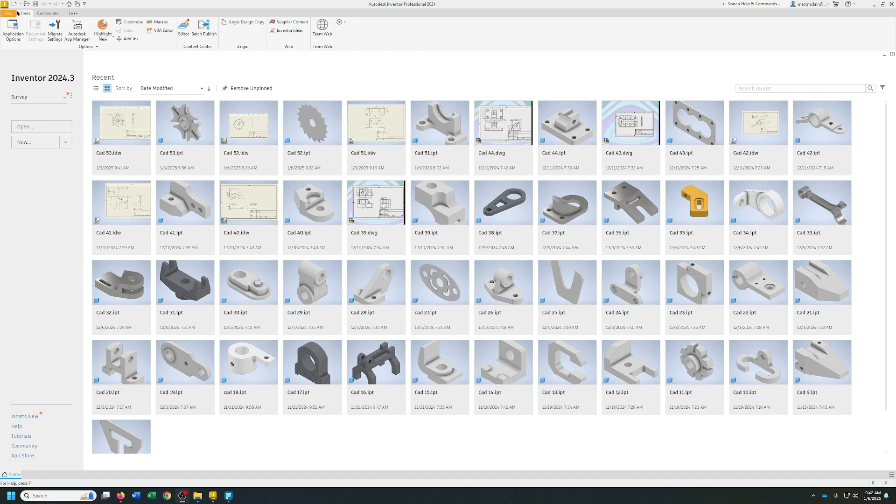All right, now we're ready to do CAD 54. We're going to do a section cut on this one once we get it laid out, okay? But first we got to get it drawn. So let's go, and it is in inches.

This is the hub, okay? So if you want to, say we don't have anything yet, right? I'm gonna go ahead and explain all this so that you can see what's there. All right, your views, your model states, let's go ahead and get this thing going.

So start 2D sketch, and we're going to actually pick the bottom plane. Don't forget to rotate it 90 degrees so the top is readable. All right, we're gonna go with the big circle. So we got a diameter of 4.5. All right, that was easy enough.

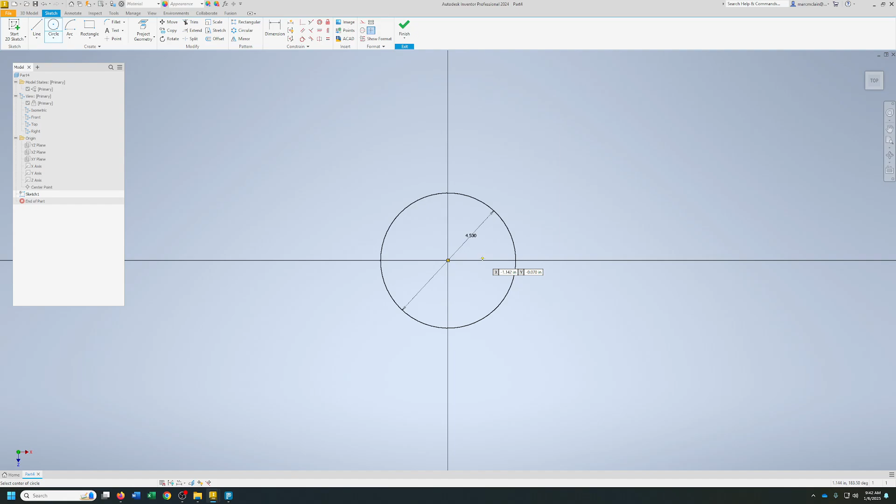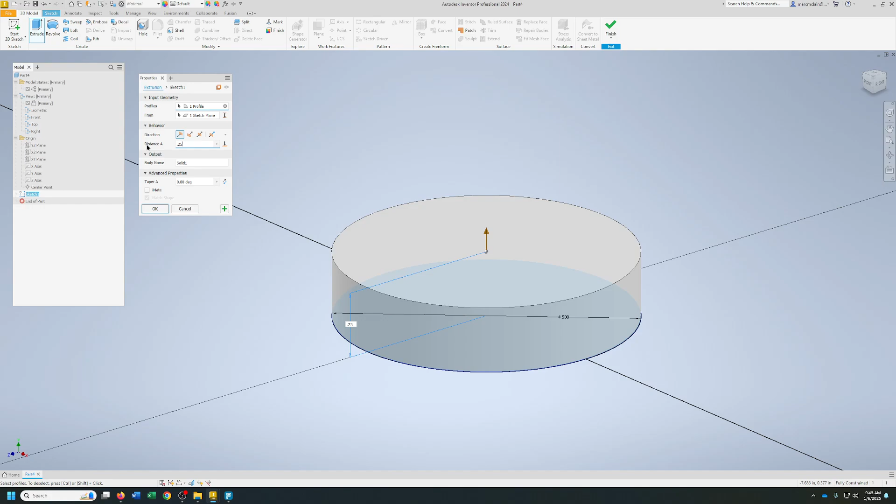I'm going to go ahead and extrude that. Now, what I could have done is I could have done all of the circles as well. But I want to show you a way to get a bunch of holes into something if you ever have to do it a different way. So I'm going to show you a different way on that. So this thing is 0.25, and there we go.

All right, now I'm going to pick the top. Don't forget, rotate that sucker. Okay, so we've got 8 holes, 0.375. All right, once again.

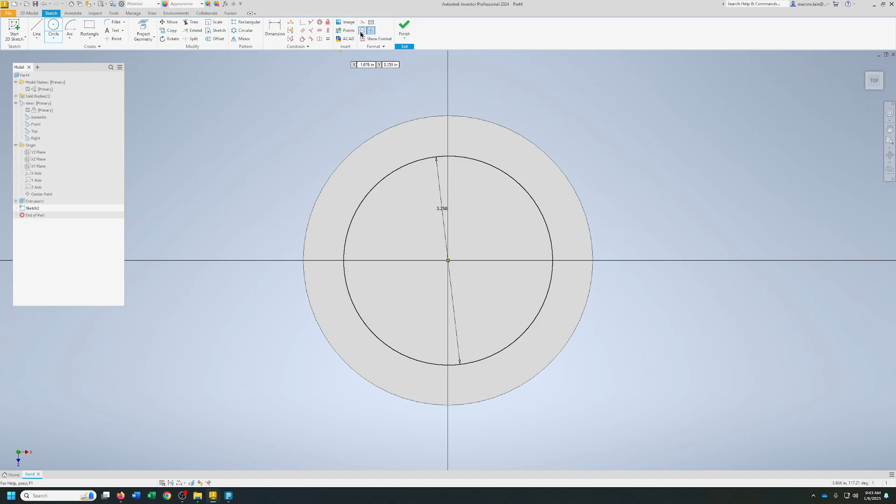Now this diameter is 3.25. Now, take it off of that. Okay, get our one circle up here, 0.375. And then we'll use circular pattern. So I'm going to pick this, pick the axis, pick that, okay? Now that will get my holes.

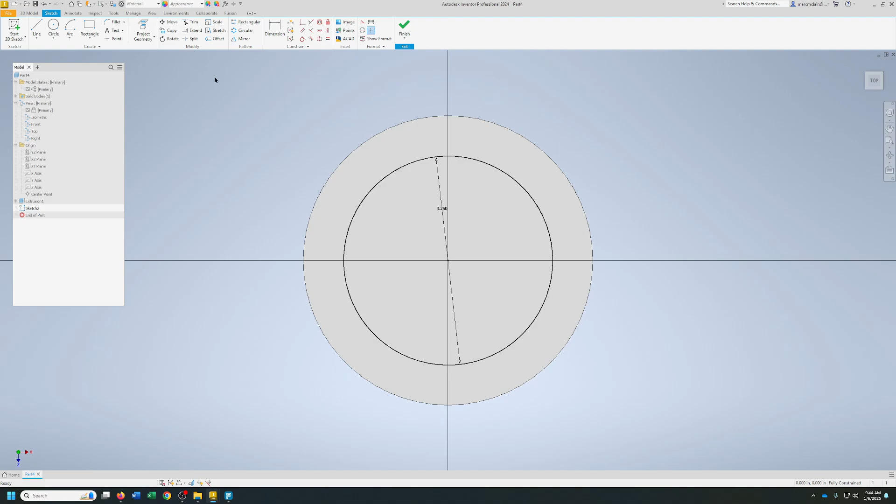That's not necessarily what I want to do. So I'm going to take that out. All right, so I've got this. I'm going to use point, okay? And I'm going to put a point right there. So there's my point. So I'm going to grab the point, and then I'm going to do the circular pattern,

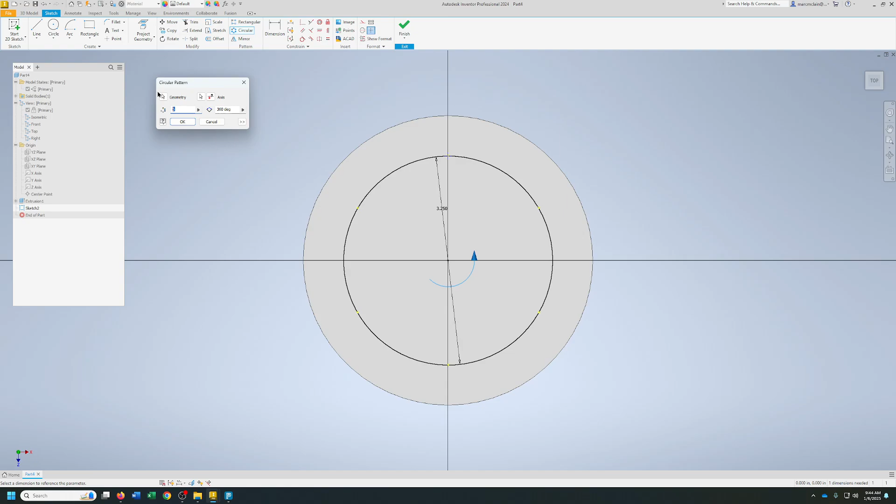Okay? And it doesn't matter if you put it on associative or not on this one. So I'm just going to leave it alone. Be 8 of them total. Okay, so there's my 8 points. I'm going to finish that sketch.

Now, hole. See? Does them all. 0.375. Hit OK, and there's those. All right.

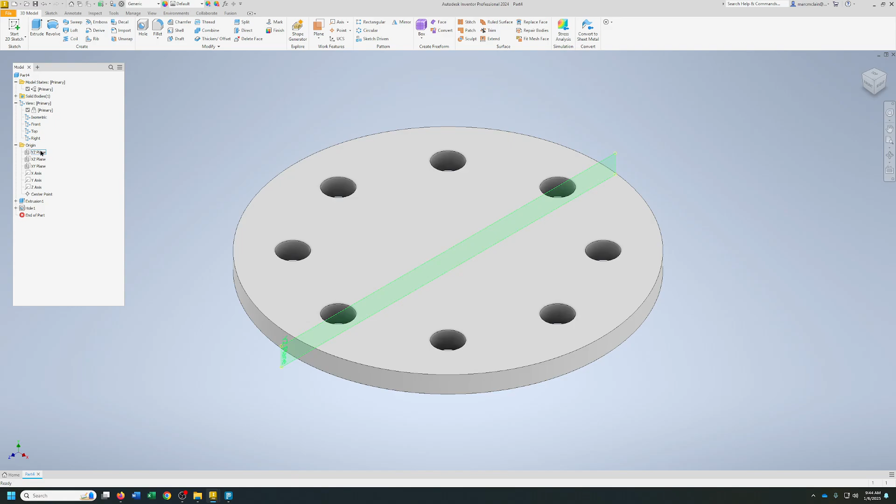All right, so that's the base. Now we got to get the other part. So remember, I did it right through the center. So we can pick either of these planes. I'm gonna pick XY. F7, that splits it. Okay.

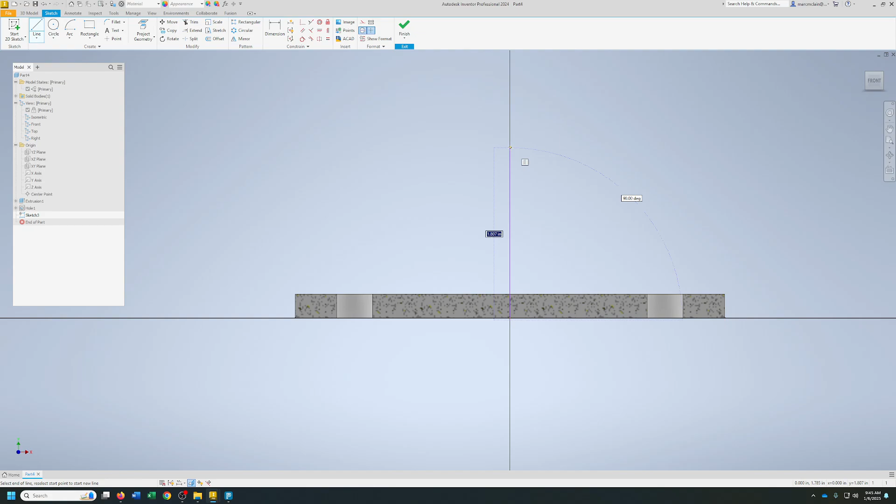Now, what we want to do is we want to get the tower part of this. Okay. So I'm going to draw a center line. And we'll start here at the bottom, and I'm going to come straight up with it. And it doesn't matter how far because it's just going to be our center line. Now, I'm going to lock that center line in place. So I'm going to hit lock and lock it.

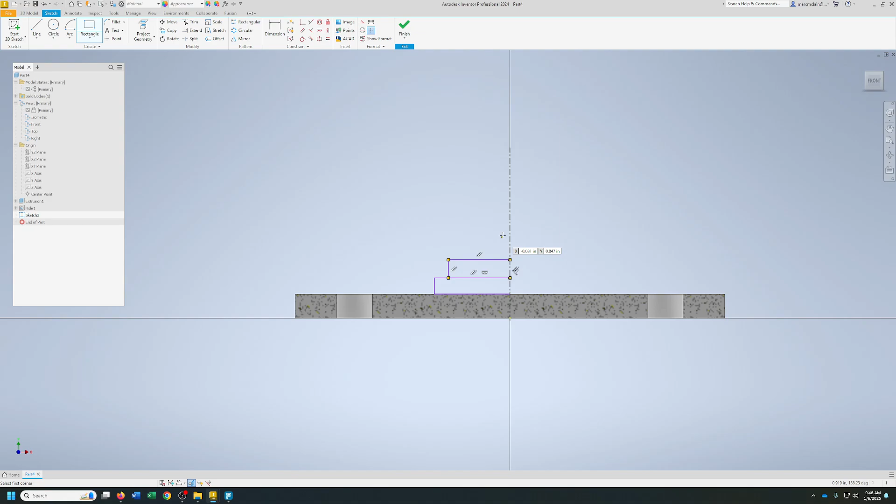Now it's rectangle time. Oops. I always forget. There we go. Let me turn that off. There's one. And then another one. And then another one.

All right, now we'll clean up a little bit. Get rid of that one. Get rid of that one. Get rid of that one. Each one of these is going to be 0.25 tall, okay? All right.

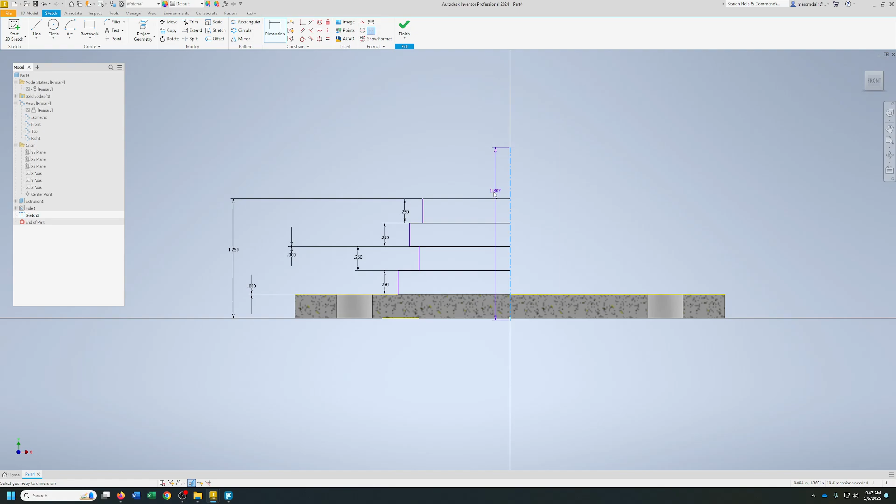Make sure that that's, yep, we're good. All right, so now we're going to get our widths. Here's the cool way to do that. We're going to do dimension. We're going to pick the center line first, and then we're going to pick the edge, okay? Now it gives me what's known as a linear diameter, and that's what we want.

Top one is 1.5, okay? This one is also going to be 1.5. Those two line up, okay? This one, see, if you pick that one first, how it messes up. Always pick the center first, okay?

This one is 1.75. And then the bottom one is 2. All right, now we've got that, so all of our stuff is there. I'm going to go ahead and trim through here.

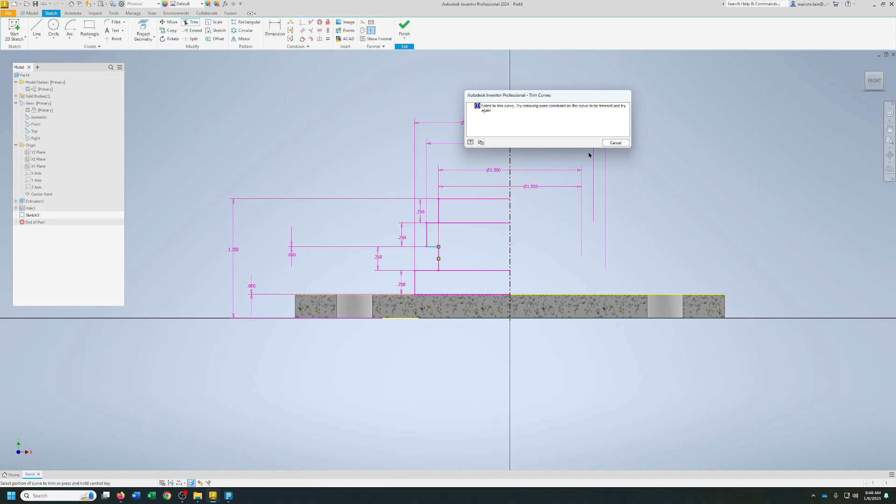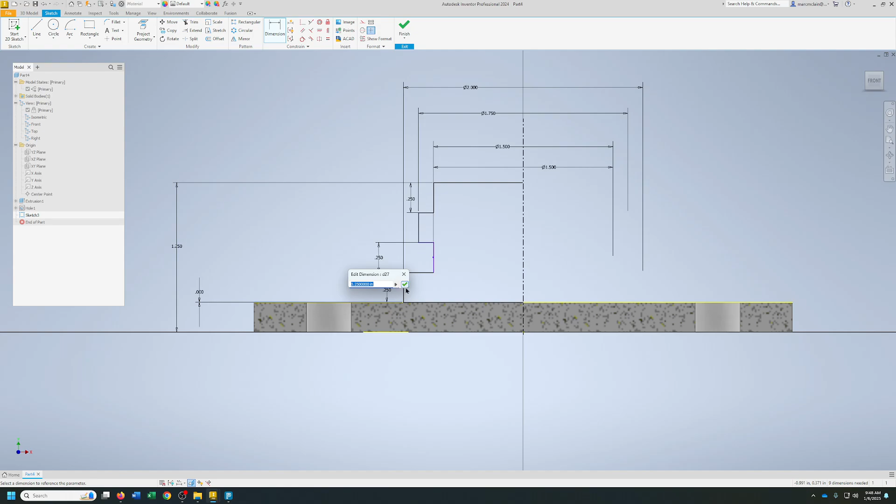There we go. Now I'll put that dimension back. So that's got that, right?

Now, I'm going to draw a line straight down through here. Actually, no, I'm going to draw a line straight down here. And then I'm going to dimension that line.

So once again, we got our linear diameter. And that hole in the middle is a diameter of 1. So we'll say that. And then I will trim this off and that off.

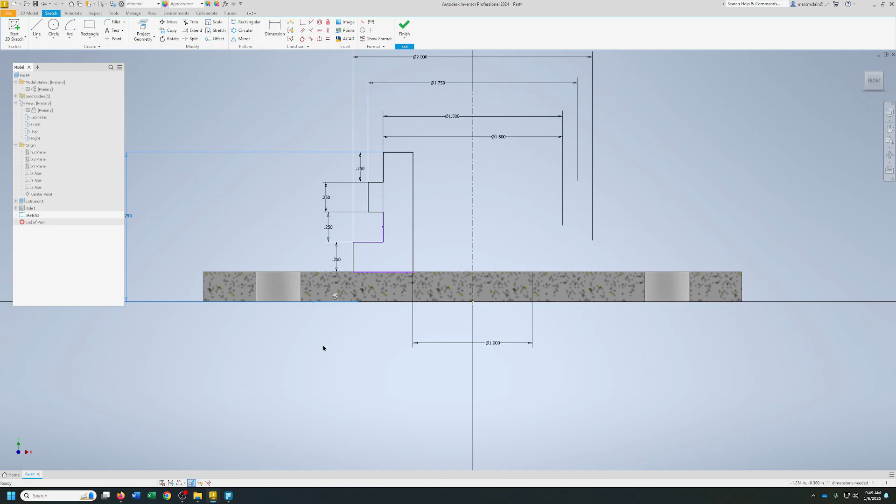There we go. All right, now, 3D model, revolve. Just pick that. See what it does?

Now, all we got left to do is the hole in the middle. So I'm going to pick this, new sketch. Project geometry, that 1-inch hole, 3D model, extrude, cut through all. And we are good.

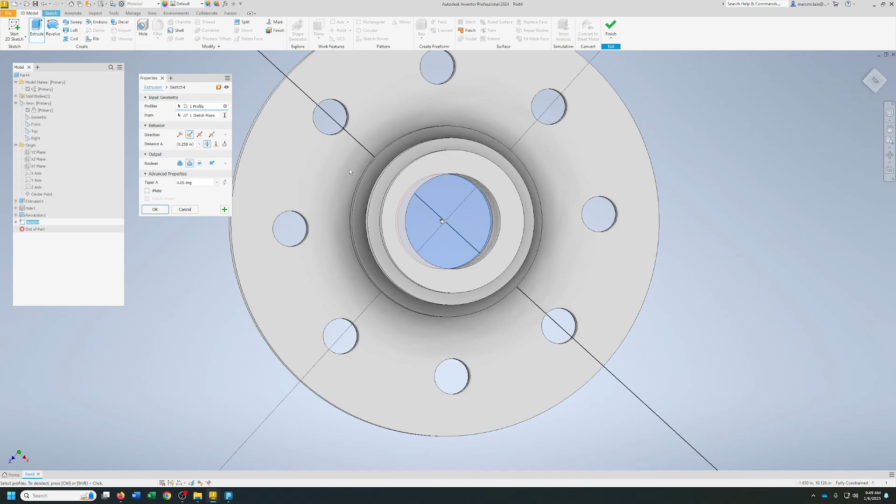All right, so that's got that part. All right, now in our layout, see now we got a solid body up here. So we'll rename that. This is called the hub.

Easy enough. Once again, no material, so we'll just hit update, get you all your numbers, hit OK, and we will save this as CAD 53.

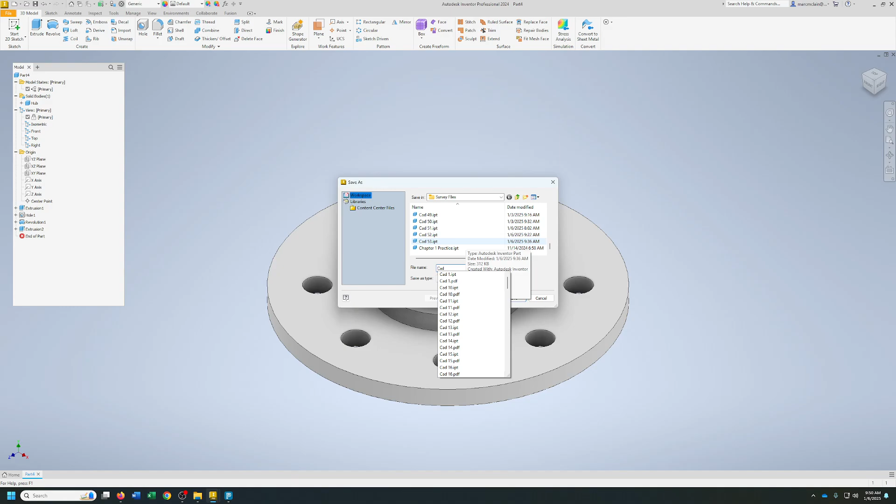Excuse me, CAD 54. Save that as CAD 54. And we'll get our new one. Okay. Once again, doesn't matter. Either one of these is fine.

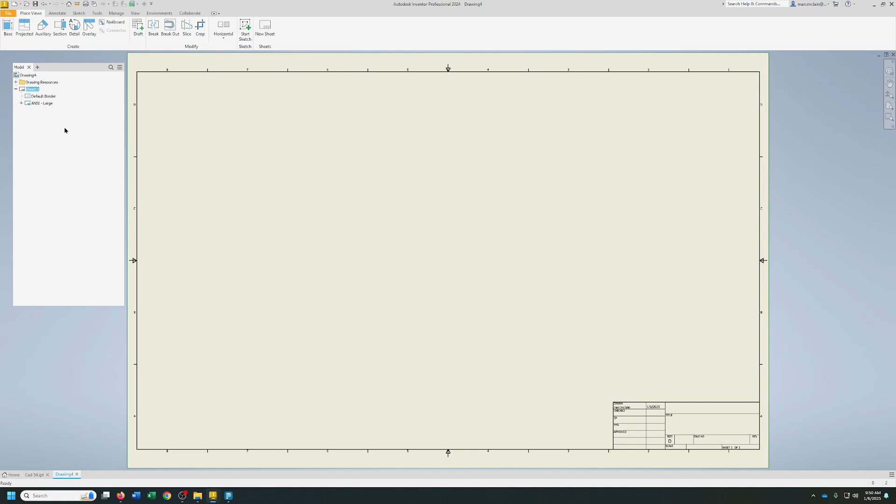And we'll change our sheet size to 11 by 17. And do our base view. All right, now, I don't want the front to be the base view on this, so I'm going to hit this, and that's going to rotate it up.

All right, now I'm going to pull this over here. They're showing a top and front view, so that's what we'll do. But the front view is not going to be just me placing that. We're going to place this view and hit OK.

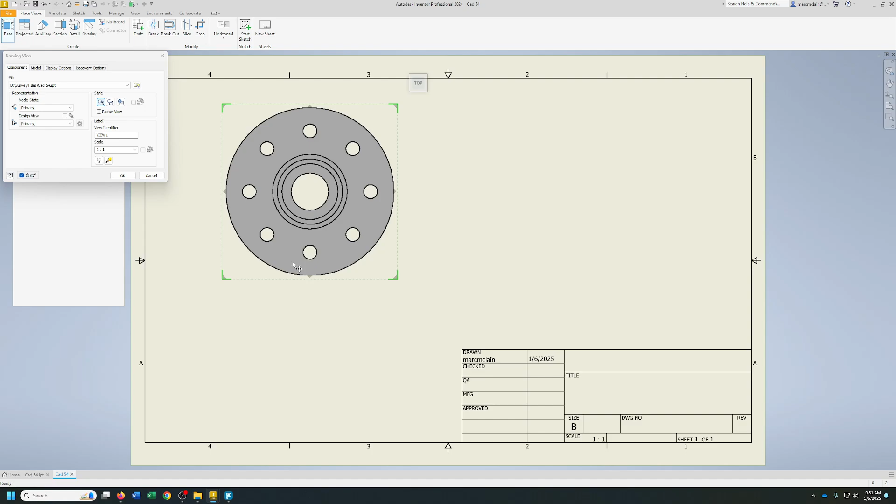All right, now section. Pick that. We want to line up with this. Go through there. Make sure you go. Don't stop on the edge. Go past the edge a little bit. And there's your section view.

Okay. Now we can start dimensioning. So annotate, and we'll do this first. Pick here. 1, 2, 3, 4, 6, 8.

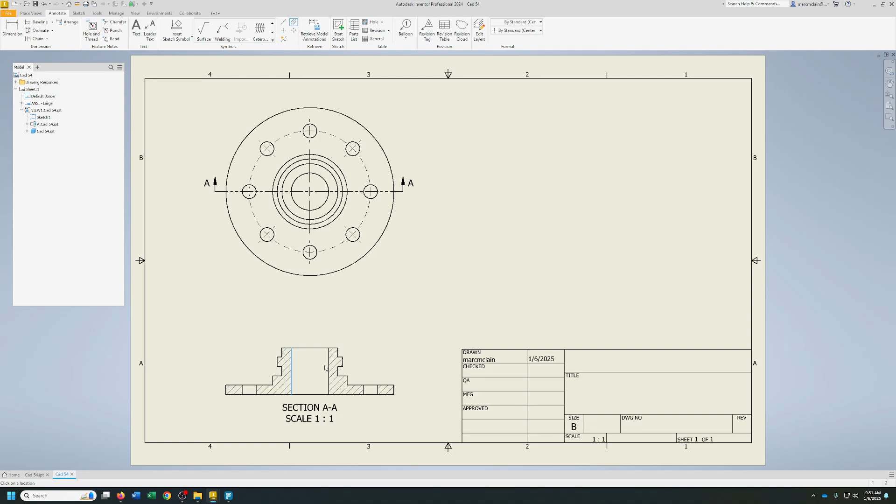And there we are. Now I'm going to use this. Pick this line and this line. See how it gives me a center line through those? Do the same thing with this one. And the same thing with this one.

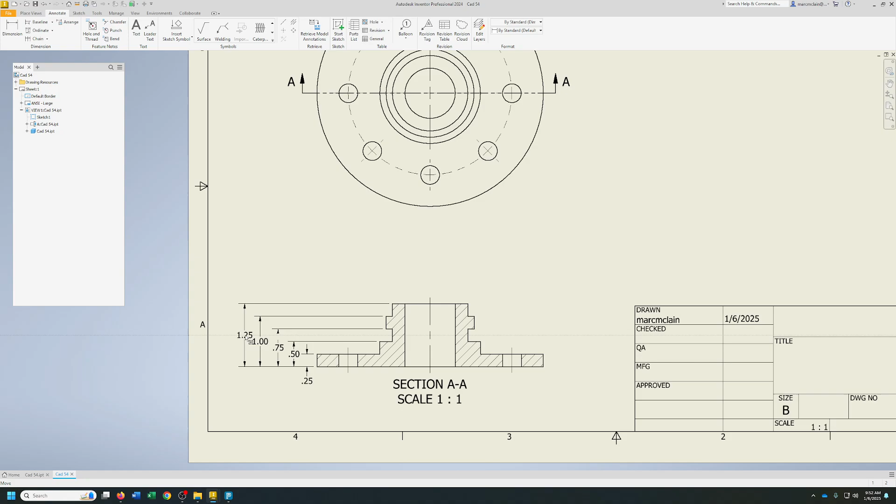All right, now baseline. 1, 2, 3. There we go. All right, that's got that.

Now we can just do there we go. Change our that and then go back to text. Hit the home key, 8X.

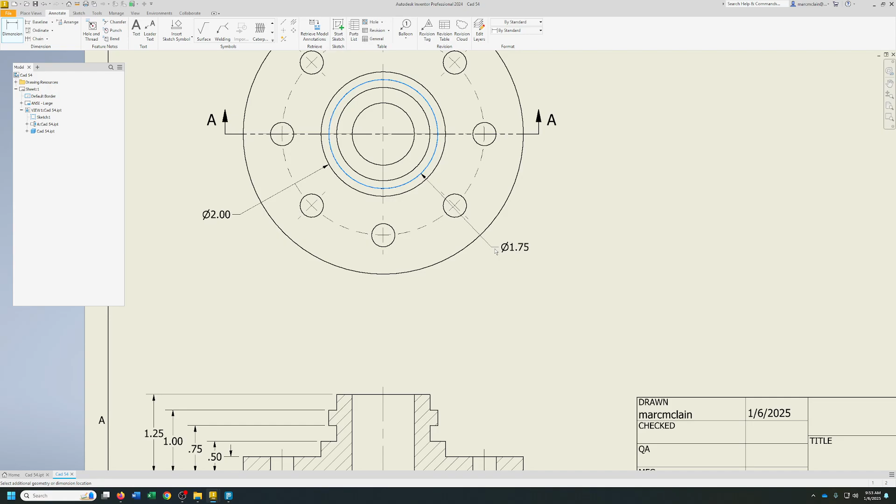Now the question is do we want to do it the same way they did it? And I usually prefer to put mine on the actual thing. I like to do my diameters, you know, in the diameter spot. And I'll just do one of these just to get the whole thing.

All right, so there we go. We got it laid out, got it full of dimensions, and we've got our section cut. And

we need to save our drawing. CAD 54. Now I'll put CAD 54 down here. Double check, make sure I haven't missed anything.

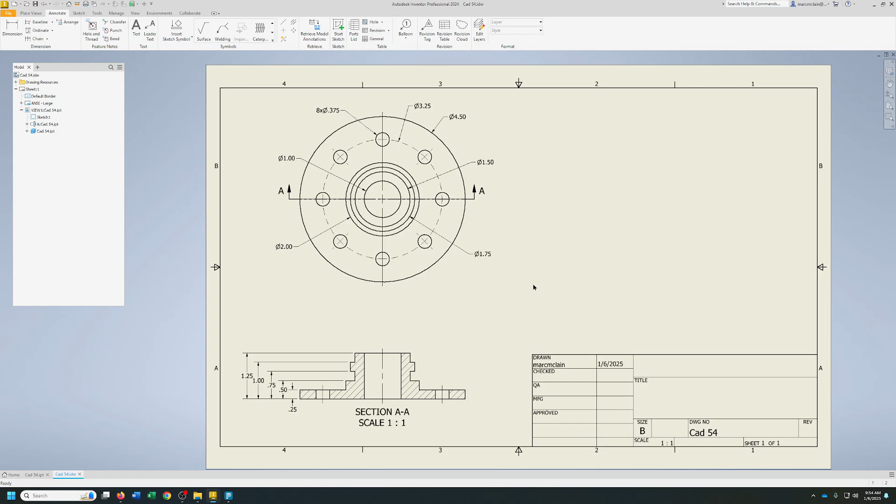Think of it. You know, got that one. Got that one. Got that one. And got that one. Okay. And then that 8, and this, and then this. All right, we're good. And we got all these over here. So we're done with CAD 54, and we'll move on to CAD 55 in a minute.